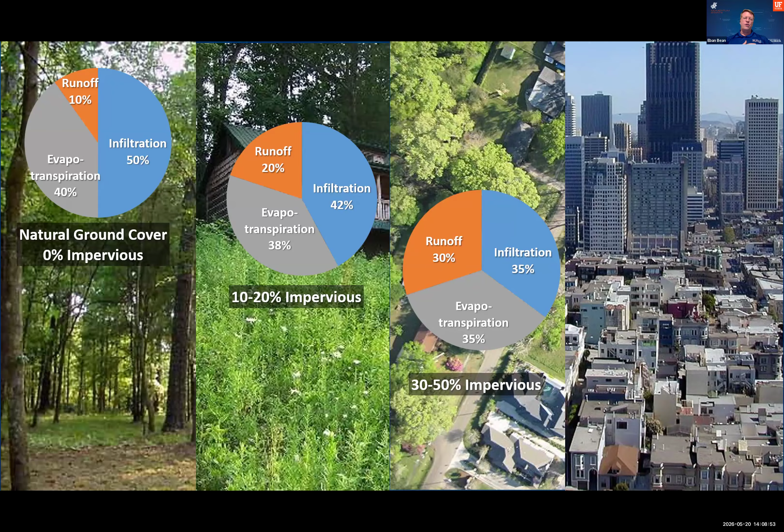And now when we look at your 30 to 50% impervious, think of your residential development, basically quarter-acre lots or smaller. Now we've got maybe 35% infiltration, 35% evapotranspiration, and we're up to about 30% runoff. And then in our ultra urbanized downtown urban centers, we've got only about 15% of that rainwater infiltrating through cracks and limited pervious area, 30% evapotranspiration - which is really most likely evaporation from puddles - and about 55% of that rainfall actually runs off.

Now, if we take the 30 to 50% imperviousness, the residential neighborhood, and compare that to natural ground cover - thinking 10% runoff to 30% runoff - that doesn't sound like much. There's only a difference of 20%, but it's actually 3 times as much rainfall being converted to runoff by changing the landscape that way.

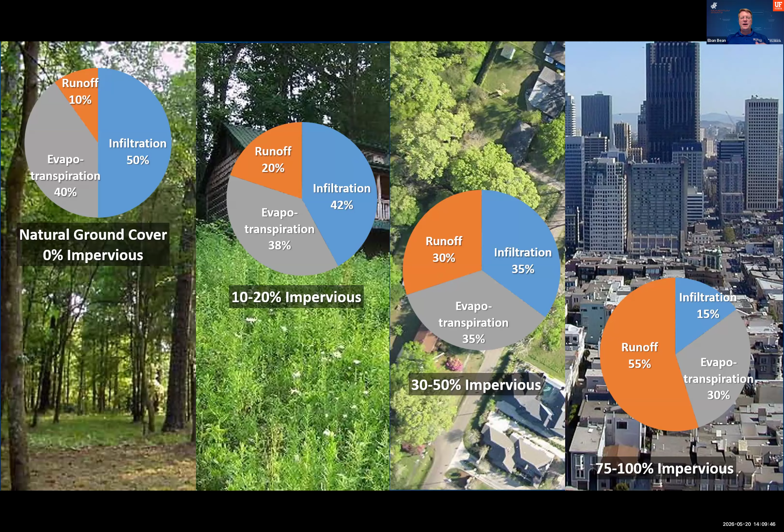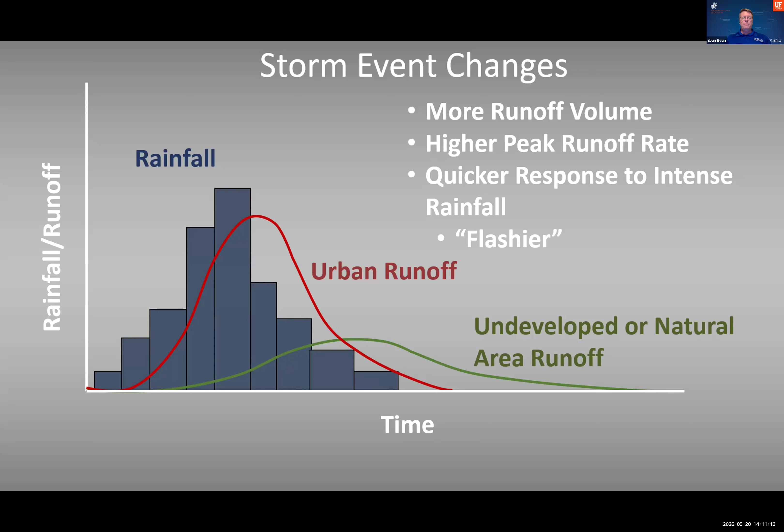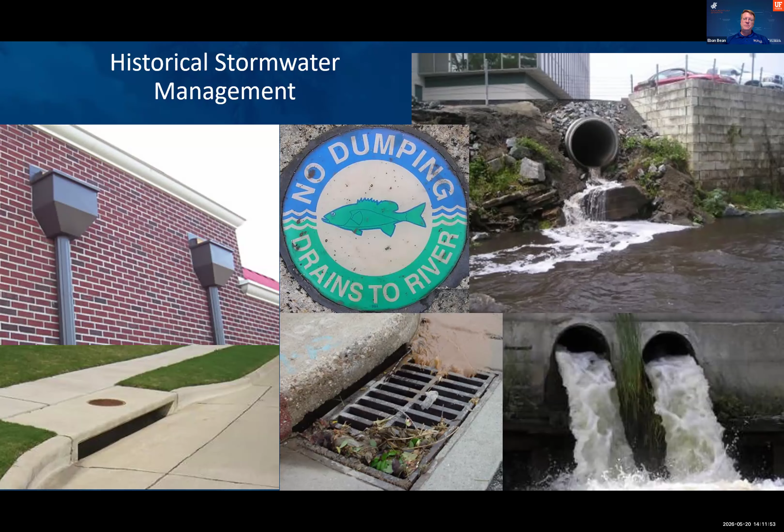Historically, our approach to stormwater management has been to get water off site as quickly as possible. If you look at older cities and downtown areas, you probably won't see many ponds or open spaces, just pipes directed to the nearest creek or waterway. We've gotten pretty efficient at this, with scuppers on buildings routing runoff directly to the street, stormwater inlets and grates, and stormwater pipes that discharge into the nearby waterway.

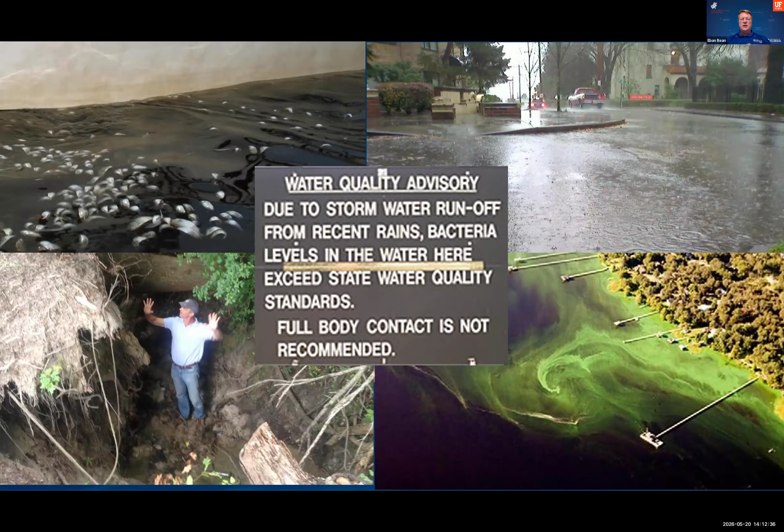But there are also water quality issues from stormwater runoff. We can have fish kills, erosion - this is a friend of mine who's about 6'4" standing in a channel that's about 20 feet deep by 6 feet wide - and excess flooding. So when we get water off site quickly, that might be good for you, but if all that water comes downstream, someone else gets flooded out. That's not a good situation. We can also have drivers for algal blooms.

When we think of stormwater runoff, it's not just the volume though - it's the chemicals that it washes off the urban landscape. A lot of urban landscapes can be sources for pollutants we're trying to manage or eliminate. Our roadways accumulate oils and chemicals from cars, sediments, and metals like brake dust. Parking lots collect sediments and organic debris.

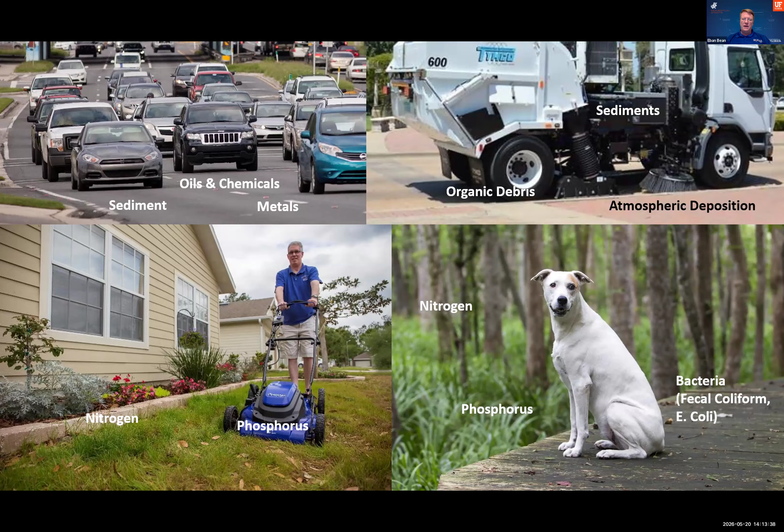There's atmospheric deposition of contaminants or nutrients that accumulate over time. Our lawns can contribute nitrogen and phosphorus, particularly if we're fertilizing inappropriately. And then our pets - this is not my pet, but essentially they are walking, barking point sources of nutrients and bacteria. If we don't pick up after them, that can enter the environment and wash off as well.

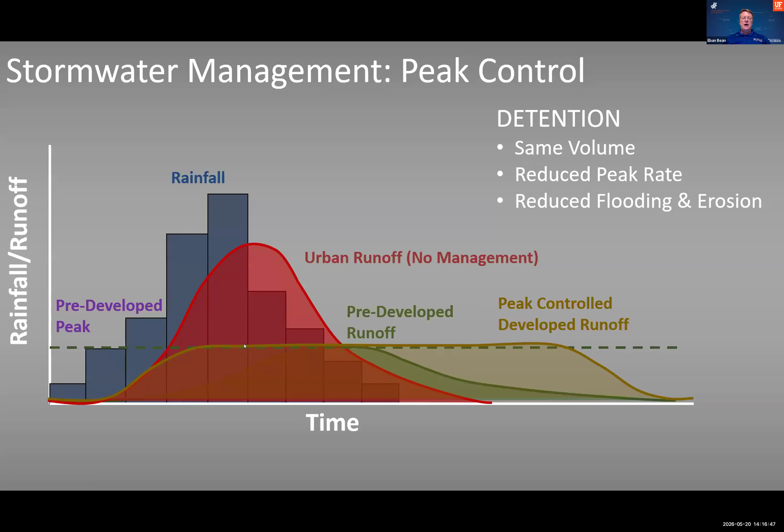With detention, the approach is to capture that additional runoff and slowly release it over time. If we look at our pre-developed runoff versus urban runoff without management, we see that increase. But if we identify the pre-developed peak as the allowable flow rate for stormwater to move through, we can capture that water and extend it out at a lower flow rate over time. This reduces flooding and erosion, reduces that peak rate, and reduces the risk of flooding downstream.

So when we look at the size of storms we're trying to manage for flooding and designing, we can't design for the 1,000-year storm event - those happen so infrequently and are so large that it's usually not feasible to design for those. What we're typically required to design for are storms within the duration of 24 to 72 hours.

Typically we're looking at storms somewhere between a 25-year and 100-year return period. With the return period, that doesn't mean that one storm of that size will occur within 25 years for a 25-year storm event. It actually means there's a 4% chance of that size storm occurring in any given year. Similarly, with the 100-year storm, it's a 1% chance of that happening every year. So that's how we can have 100-year events in multiple years that aren't separated by 100 years.

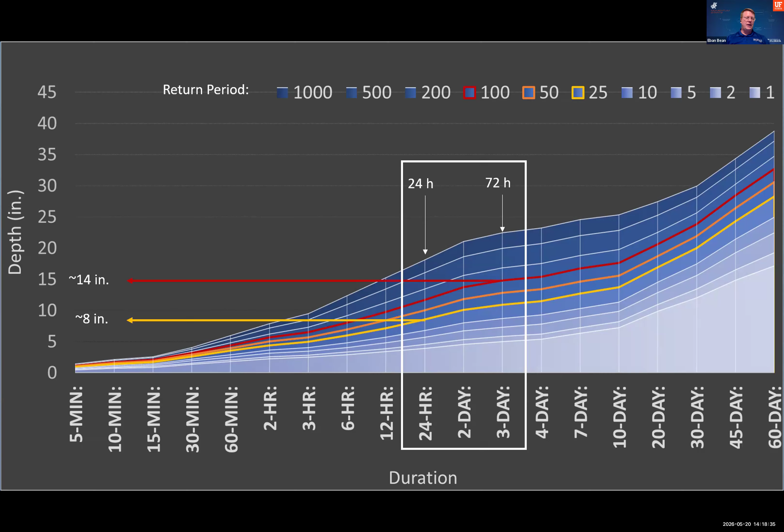If we look at the size of these storm events for the flooding we're considering, it's somewhere between 8 and 14 inches of rainfall as that design storm. So if we have a hurricane or large storm event that exceeds 15 or 20 inches in many parts of the state, that's going to have more water than our stormwater systems can manage, and it's going to overflow, causing extra flooding in our communities. So yeah, we're looking at that range, roughly 8 to 14 inches.

Stormwater ponds are one of the main ways we've implemented to manage flooding and peak runoff rates. Looking around Florida, we did this analysis a few years ago and found there are about 76,000 ponds statewide, which is probably a low estimate now given the amount of development and continued installation of stormwater ponds. There are so many that they take up more area than industrial land uses, which is pretty surprising. It's a prevalent part of the urban landscape.

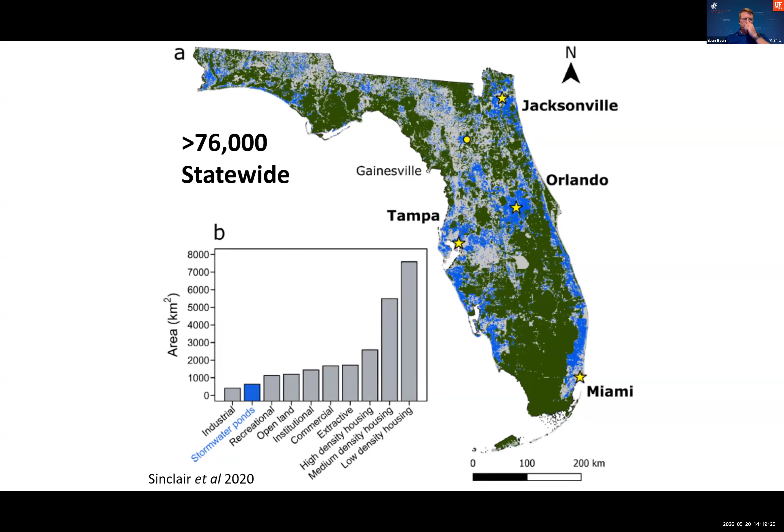The typical orientation we see in a lot of land development projects around Florida is an urban area — in this case, a residential neighborhood. We have rooftops that drain into the driveway, then flow into the street, which flows into a storm drain inlet and into a stormwater pipe collection system that goes into a stormwater pond serving that area of residential development.

This stormwater pond is designed to address several things. Number one is flood control — capturing that runoff volume and slowly releasing it, which also reduces the peak rate. We also get water quality benefits.

One thing unique about Florida compared to many other states is that elsewhere in the country, the pollutant of most concern is total suspended solids, or sediment in the water. Those areas often have very fine clay soil that makes water cloudy, and they also tend to have steep topography, much steeper than Florida's, which causes channel erosion — streams cut down and widen, moving a lot of sediment from the stream channel. That's not so much the case in Florida, except maybe in the Panhandle and the northwestern part of the state.

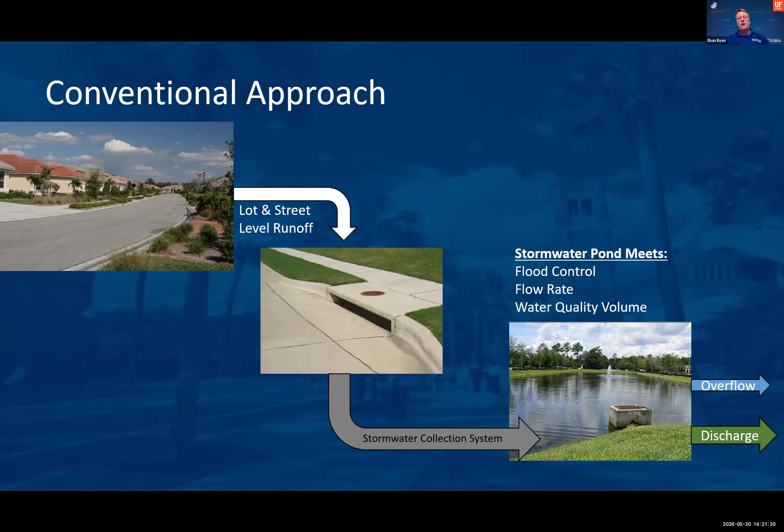Here, our biggest pollutants are actually nitrogen and phosphorus. Those are our main pollutants of concern, and that's what our stormwater pond treatment is intended to address.

While stormwater runoff is one of the main contributors to water quality impairment, agriculture also contributes, as do septic systems. So urban development isn't necessarily the biggest driver, but it's one of the top causes, which is why it's important to address. What we see is that stormwater runoff and water quality impairment tend to follow the urbanization of watersheds over time.

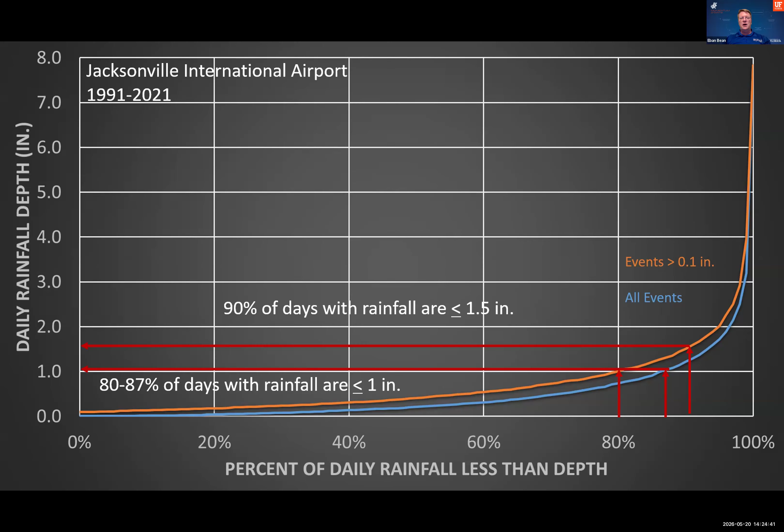So we're really looking at a very small amount of rainfall on a regular basis contributing a lot of our nutrients to stormwater.

So next, I want to get into the nuts and bolts of stormwater systems and talk about some of the different components so that when you're in your communities, you can identify and see the different elements of a stormwater system and better understand what's happening there. So we're going to break it down a few ways.

The watershed is the land that's developed, and that's where essentially runoff is generated, right? So then the water comes off of that landscape, and then it's collected into inlets.

That's where basically water is directed into pipes or channels to convey it to another location, and that's where it's usually routed to a stormwater best management practice.

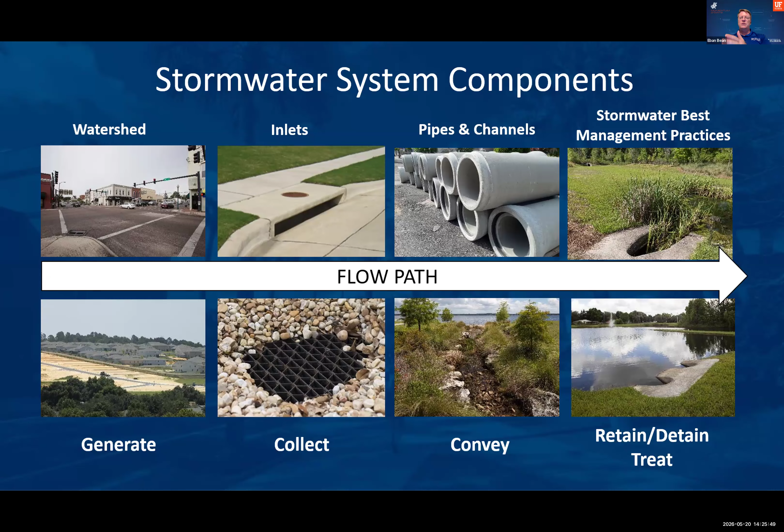In Florida, many times this is going to be a stormwater pond of some type, and we'll talk about what those are and how they function in a minute. But essentially, we have the flow path: we have rainfall in the watershed, that runoff goes into the inlets through pipes and channels and into our stormwater BMP.

So thinking first about watershed components, within our urban area we have the impervious areas on the left, which are our rooftops, our concrete, and our asphalt. These are the surfaces that essentially prevent water from infiltrating into the ground.

And so that water, instead of infiltrating, has to go somewhere—that's our runoff. On the right, we have our pervious areas. These might be forests or landscape beds or even lawns.

And these are the areas that can infiltrate rainfall, that can infiltrate runoff, and provide a function to us in that capacity.

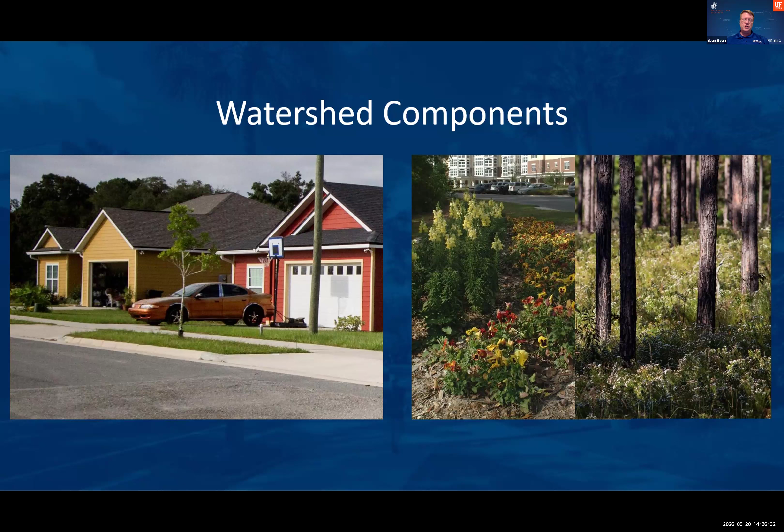Within the urban landscape, you'll often see this structure right along the sides of roads. You might have heard the term curb and gutter. I used to think that was just the name of it, just one word, curb and gutter.

But it's actually two distinct parts of the structure that's right along the roadway, usually right up against a pervious area. Essentially, you have the curb, which is the vertical part, and the gutter is the bottom part.

Now, you're probably familiar with gutters along the side or rim of your house, and that's sort of the intent here—that is the place that routes and funnels water, right?

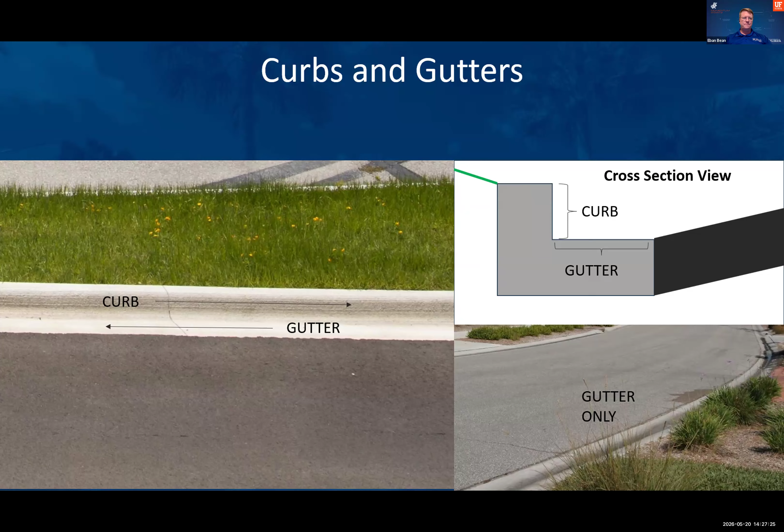And roads, you'll find, are typically going to be crowned, so they're highest in the middle, so that water drains away from the center and gets conveyed to the curb and gutters. You can kind of see this on many of our roadways.

So looking down a street, these are both on the campus of University of Florida. And essentially, when we have a rain event, that runoff flows to the edges so that the drive paths don't pond water—we don't have to drive through pools.

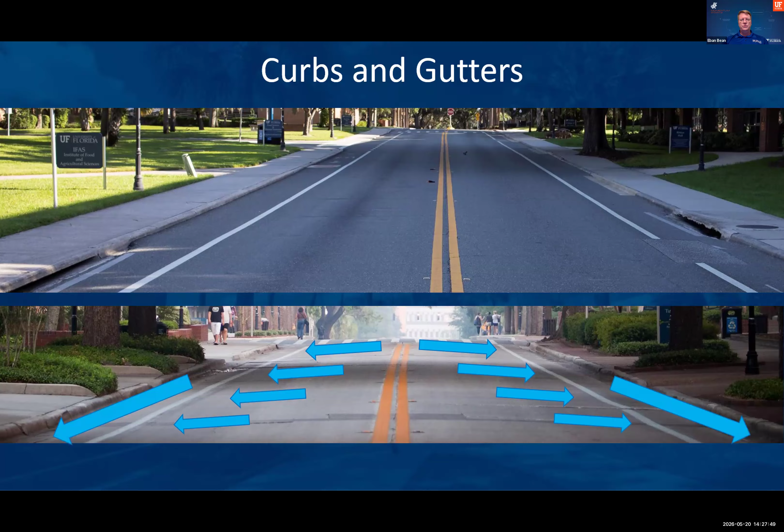We don't have hydroplaning. And then it collects along that curb and flows down the gutter into the storm drains. You can see an example here where the water is flowing down a street, down the gutter, and then flowing into an inlet.

Now, looking at the inlets, these are essentially the openings into the stormwater collection conveyance system.

Now there are several different types of inlets. This is essentially where water transitions from the landscape into a structure intended to move it to a certain location. The surface of the landscape will typically grade or slope to these inlet points, usually either a curb cut into a superficial inlet or structure.

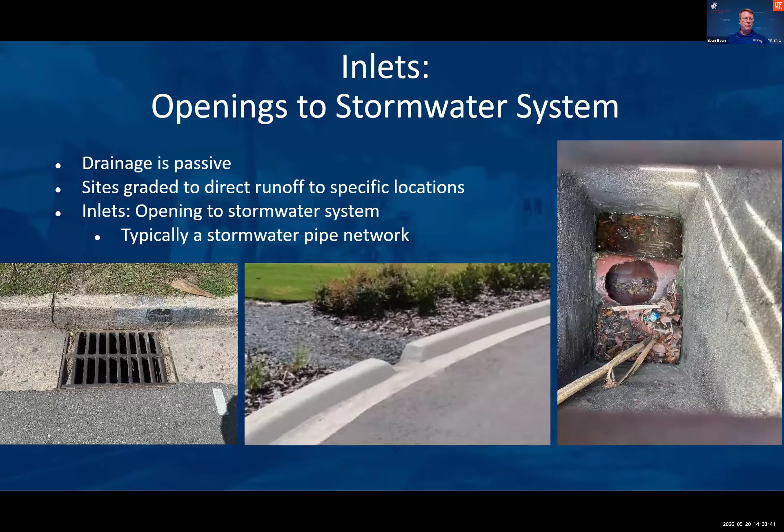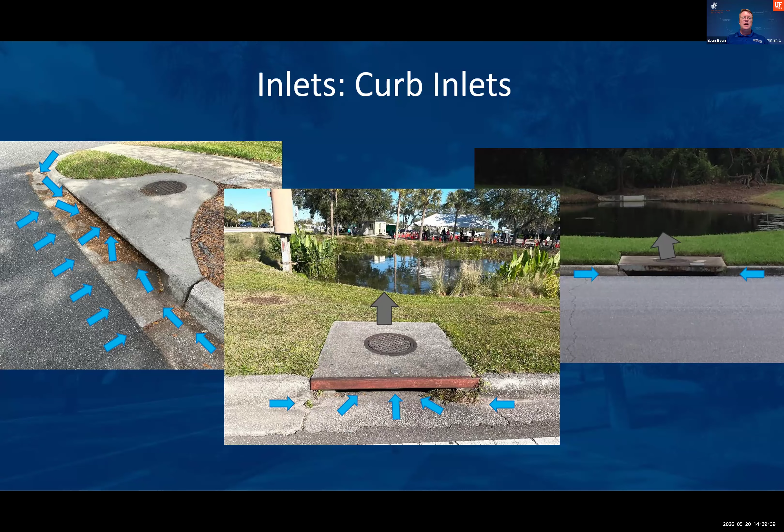These inlets come in different flavors. These are examples of curb inlets where the curb has a break in it, and water flows down into a storm pipe. In the left example, notice the debris that's collected there, which can eventually cause problems if it builds up and blocks water flow. It's good to avoid putting leaves or grass clippings down into them, since grass clippings carry a lot of nutrients. In each scenario, water is directed to the inlet and into a stormwater pipe that goes, in these two cases, into a stormwater pond immediately adjacent to it.

Inlets and grates are another common feature, usually seen adjacent to roadways or in parking lots. These are in low spots where stormwater runoff can drop vertically into a pond or pipe and drain. Part of the function of a storm grate is to create a smaller opening than a curb opening so that larger debris doesn't make its way into the storm drain system.

You do see a combination on the left of a curb inlet and a stormwater grate — that's also a configuration we see. But oftentimes these grates stand on their own, level with a low spot in a road or parking lot, and you can see where the flow lines go at this site. Again on the left, with that yellow curb, note the debris accumulation. If that continues to build up, it can cause issues with the stormwater system by not allowing water to flow through as quickly as it's supposed to.

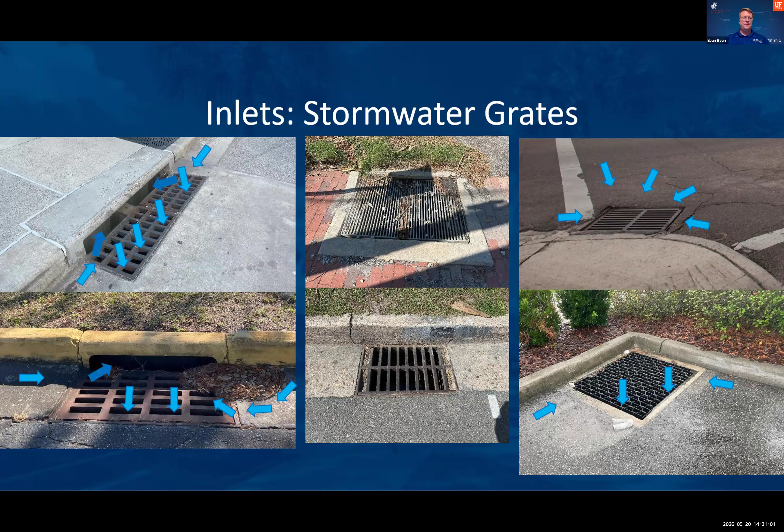Curb cuts are openings in the curb that try to connect impervious areas with pervious areas. These are also areas where debris can accumulate and cause backup, reducing function. But this is a really efficient way to make adjacent pervious and landscape areas more functional, so runoff can flow onto the landscape and infiltrate into the ground rather than going into a stormwater pipe network or pond.

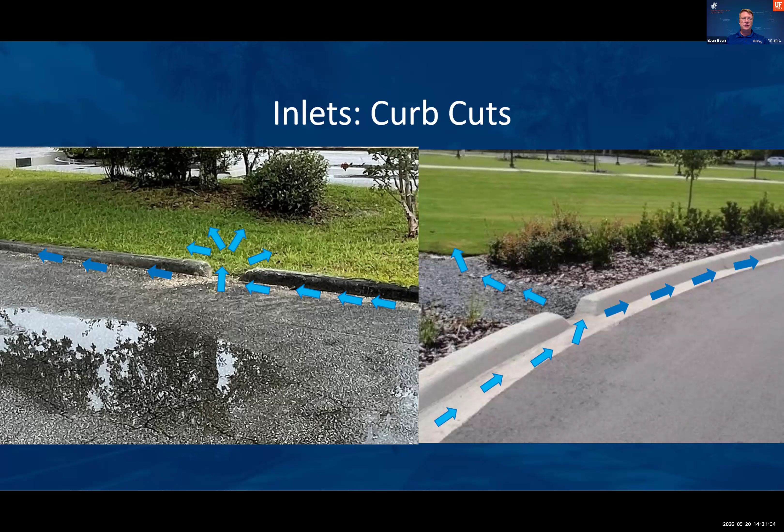Pavement drains are found in the middle of a roadway or drive path. Essentially they are a drop inlet into a stormwater pipe network, usually at the low spot, and most often within a parking lot, since the sides are graded to the stormwater inlet, allowing water to flow into a pipe network that flows downstream. You see this more in parking lots than roadways, because with roadways we're crowning the road to sheet water away rather than collecting it in the center.

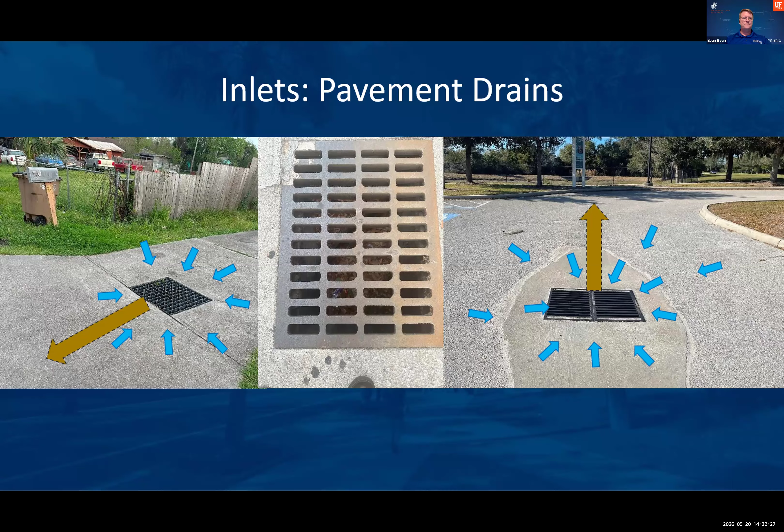Another similar configuration to those parking lot drains is field or surface drains. These are basically in the middle of landscaped areas or at the ground surface, allowing runoff to flow into them. You can see the screening function happening, particularly in that upper center one. If debris is allowed to build up, that can again cause issues with water not flowing through as quickly as designed. Here water collects at the surface and is then taken away by a pipe underneath.

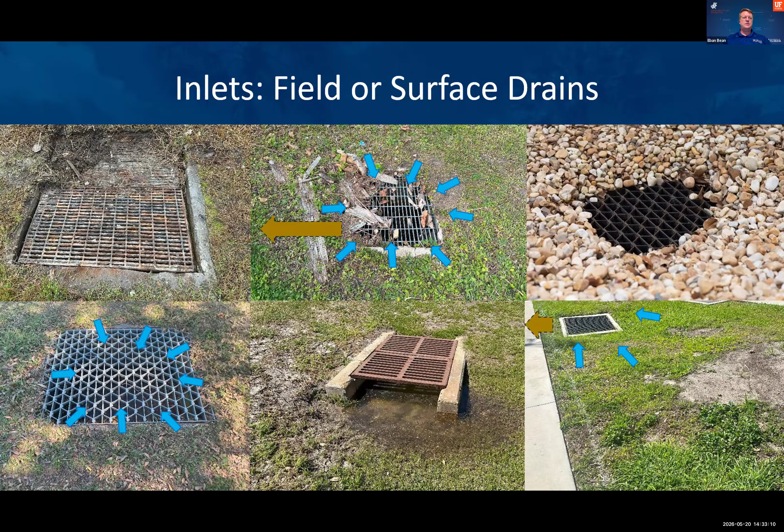Now let's take a look at the stormwater conveyance elements: stormwater pipes. These are oftentimes out of sight, out of mind, so you most likely haven't seen these much, but there are some pretty common materials.

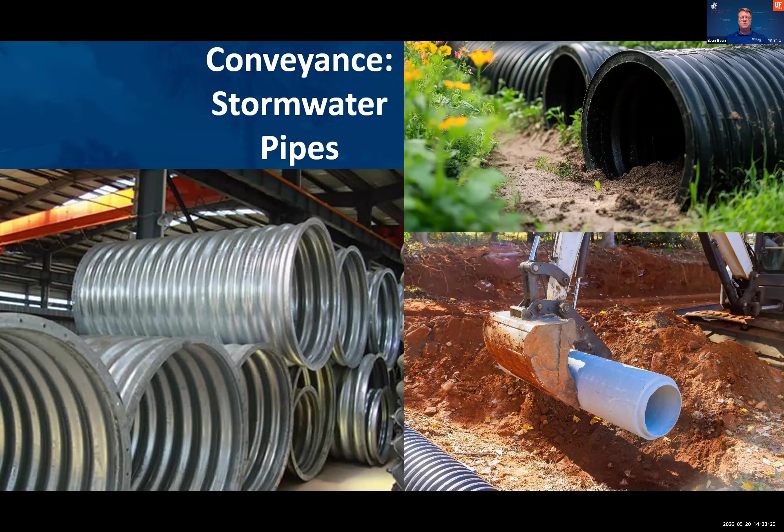A lot of times we'll see corrugated plastic pipes, corrugated metal pipes, and concrete pipes. Those are the three most common types of material in stormwater drainage. Ideally, we'd like smooth wall pipes rather than ridges or corrugation, since this helps water move completely through and not get trapped behind those ridges.

When we see manholes, these are the pipes for our storm inlet or stormwater system, not the sewer system. If you're curious which system a manhole is for, usually on the top it'll say sewer or storm. You can take a look at storm if you want, but I would not recommend opening a sewer.

Culverts are pipes, usually short sections, intended to move water from one location to another underneath a roadway or crossing. That's essentially all a culvert is. These can oftentimes fall into disrepair if they're not maintained, and can have accumulation of sediment downstream or upstream and get clogged.

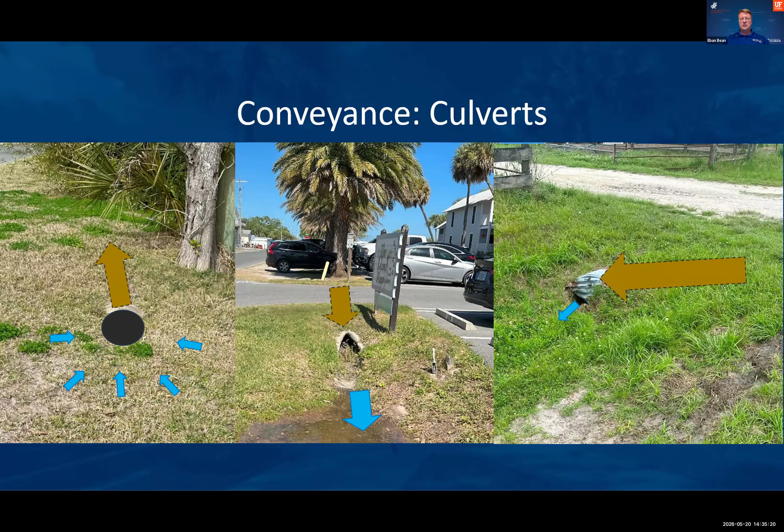Maintaining them is important to having water flow through. These can also be the inlet to a stormwater system. In this middle picture, water is coming from the background to the foreground, and here on the right, water is moving across. That blue arrow is small because this corrugated pipe has likely been driven over and crimped, so the opening is now smaller and can restrict the flow. Maintaining and making sure pipes are large enough is important.

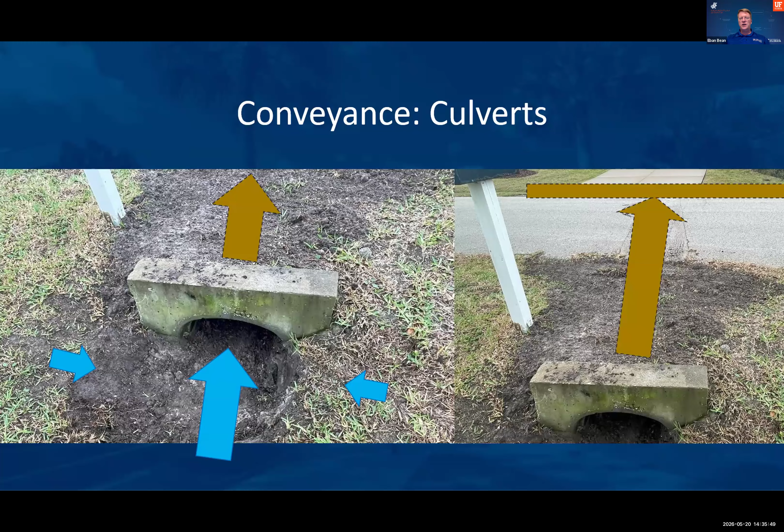Sediment is also a big concern. It can accumulate in culverts and clog them up, so it's really important to keep that clear. Usually you'll have a swale leading into a culvert - water drains from the landscape on either side, accumulates, and flows through under the pipe into another cross pipe or other place downstream.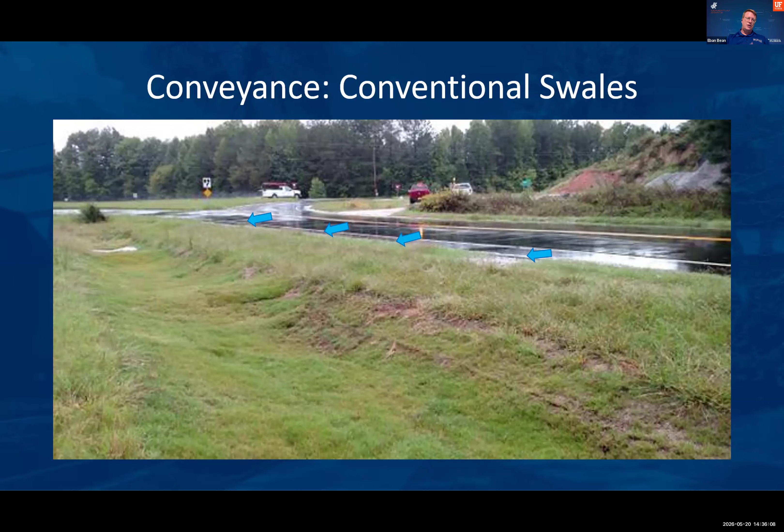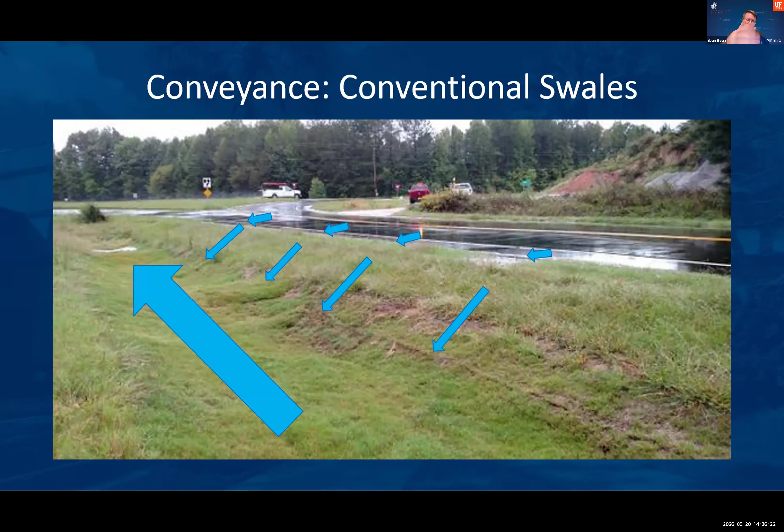A lot of times you can see swales along roadways - you may call these ditches from other places, I did growing up. But swales provide multiple functions. They not only convey and move water, with the roadway sheeting water down the slope into the swale and downstream, but as water moves downstream it's also allowed to infiltrate into the subsurface and get filtered, providing some water quality benefits as well.

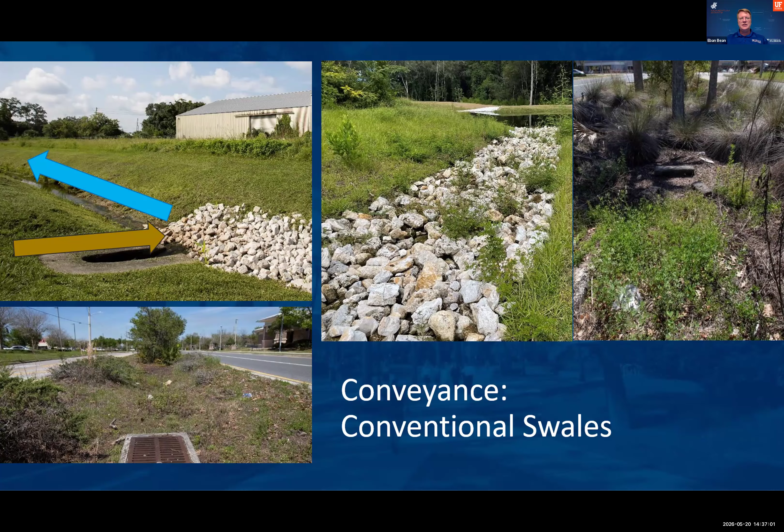Other ways you might see swales - if there's an erosion issue, a lot of times you'll see larger stone or rock in the channel to make the channel more stable so it's not washing out or eroding that sediment. In this figure in the upper left corner, water comes in this pipe from the left and has to make a 90-degree turn, which is essentially what's causing some erosion here. You can see they've tried to stabilize that with rock in this middle picture as well.

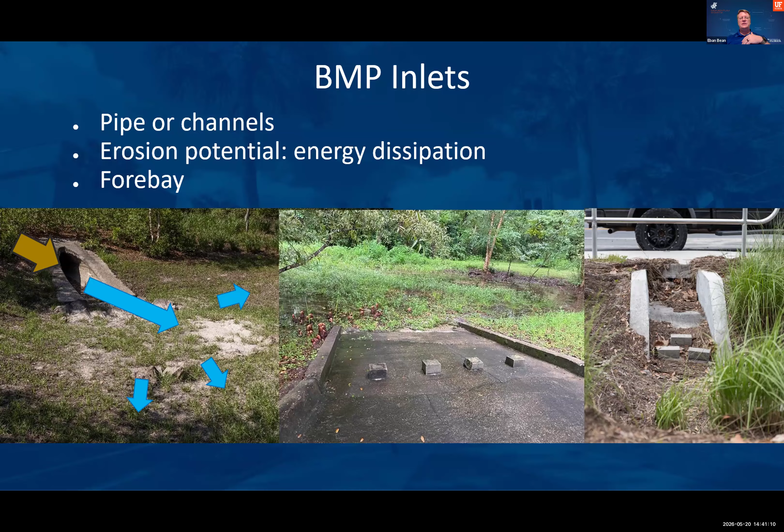With the one on the left, we have that water coming in. It can kind of erode out this area, and then water basically spreads out and dissipates that energy. If we need to reduce that energy more, other ways that we can control or dissipate some of that energy are through these blocks in these channels as water comes in. That can help to dissipate it. There's also a structure known as a forebay that will essentially create a pool at the inlet, and that can help to dissipate the energy as water comes directly into that BMP.

There's two different ways that BMPs can be configured with a stormwater pipe system. There's always a capacity limit to a stormwater BMP, whether it's a pond or a tank or whatever. There's a maximum volume, and once that's reached, that excess water needs to continue to be routed somewhere else. So we can either have the BMP be online or offline. I want to illustrate what the difference is here.

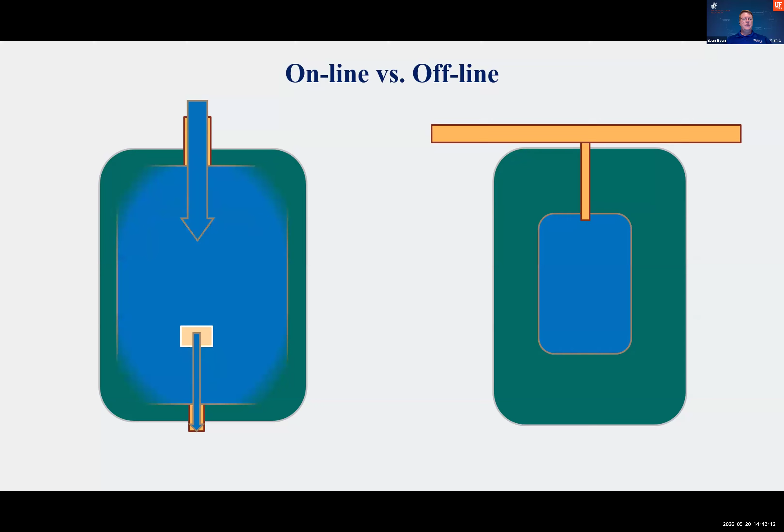With online, we have water come in for small storms. Water comes in and then bleeds down fairly quickly, and we don't see a whole lot of change in the water volume of the pond in this case. For larger storms, though, that water comes in, fills up the pond, and then it overflows or bypasses that outlet structure. So essentially, all of the water that comes off of the landscape and into the stormwater conveyance system moves into and out of that pond.

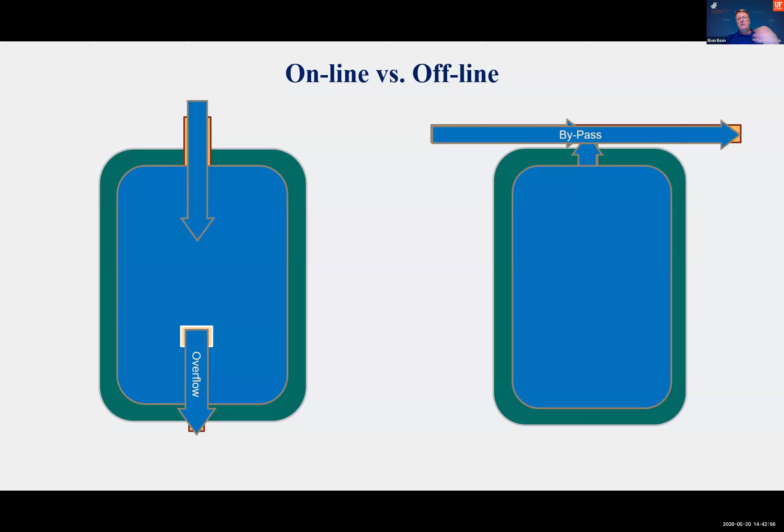If it's offline, for small storm events, we basically have just direct flow directly in, and we don't really see much difference in the operation. But when we have a large event, we'll have a high flow come in, fill up that pond, but then instead of overflowing downstream, we actually back up the water level, and then we have bypass where the extra stormwater bypasses that inlet and continues to flow downstream. So now not all of the runoff flows through that BMP - it's really just that first volume of storage that fills up the pond, and then the excess goes back down beyond it.

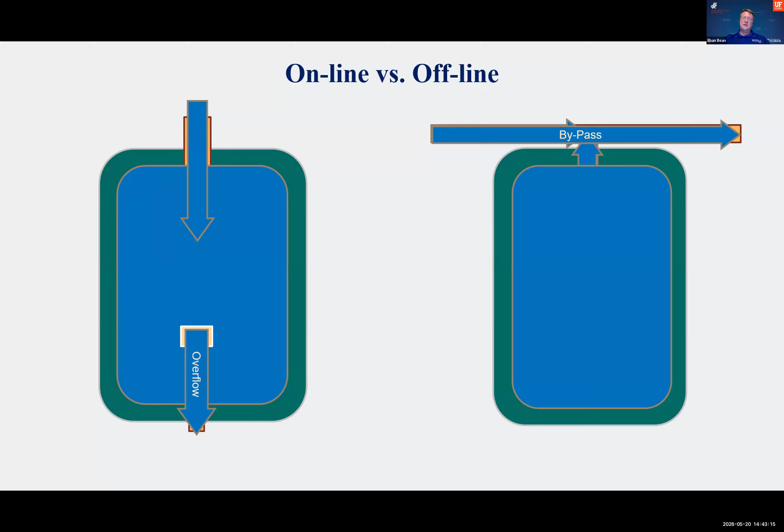So when you're looking for BMP outlets, outlets are only going to be for BMPs that are online, because with an offline system, it's going to back up through the inlet. There's no need for an outlet.

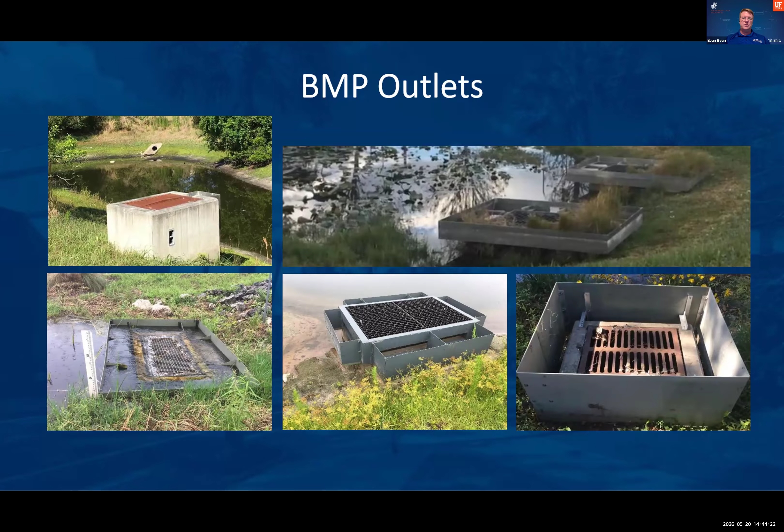So when we talk about different types of ponds or different types of BMPs, I want to go over the main ones real quick. The first one is what we call dry retention. This is something you would be able to see in areas that have very sandy soils, and maybe even in the springs areas, but you've got very well drained soils where water can infiltrate into the ground very quickly.

Essentially, the main way this functions is that water comes into the basin, fills up, and then overflows out through the overflow structure if it fills the basin, and that would discharge. But essentially that water would soak into the ground. For the most part you'd lose a little bit to evaporation, but it recovers its volume by infiltrating into the ground, and that also retains those pollutants.

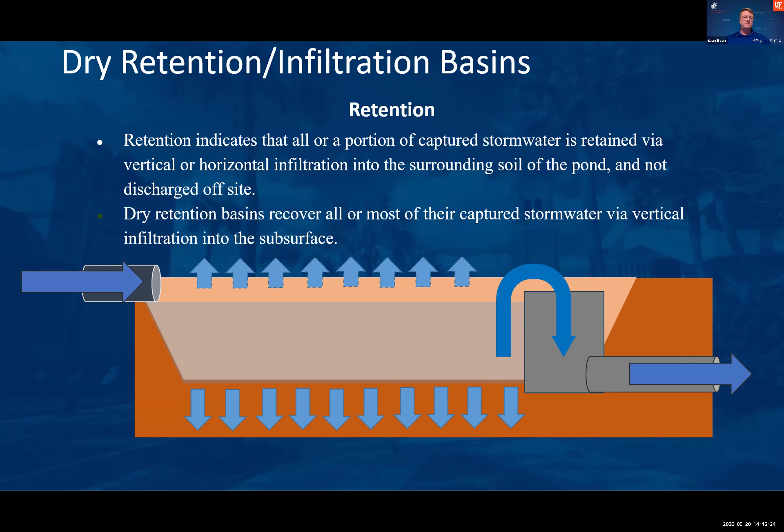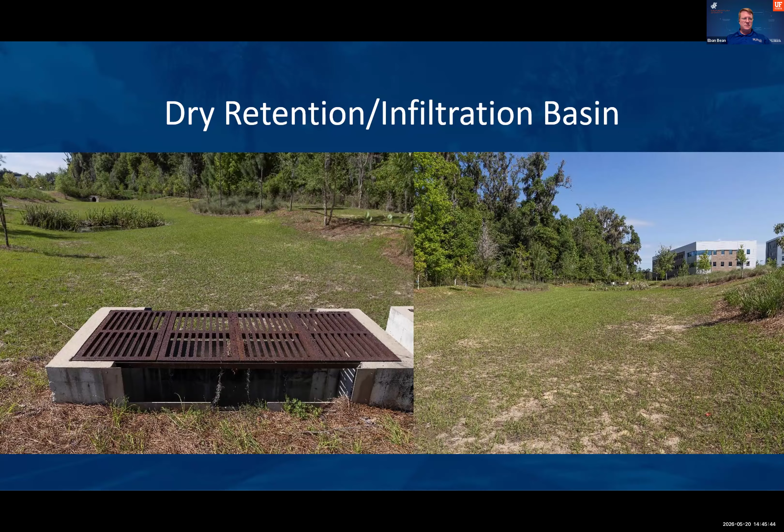You'll often see these look like a grassed area that is depressed, a low lying sunken area. You'll see these in a lot of areas where we have sandy soils, well drained soils. You're not going to usually see wetlands nearby, so keep that in mind.

Underground exfiltration is another way we can take stormwater from the surface and infiltrate it below. These are typically configured offline, and essentially stormwater comes off of a parking lot that overlies the structure, goes into a stormwater inlet, and then underneath that parking lot it will flow into these half pipes, these structures here. There's a lot of volume, a lot of space there.

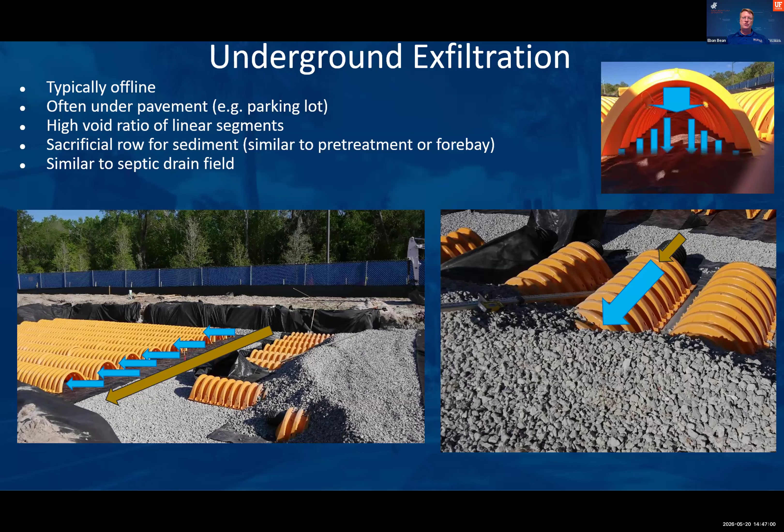Groundwater mounding is something I want to touch on briefly, because it can explain why, for example, a dry retention or any other infiltrating practice may sometimes, for certain storms, recover completely very quickly, but for other storms it may stay ponded for a long period of time.

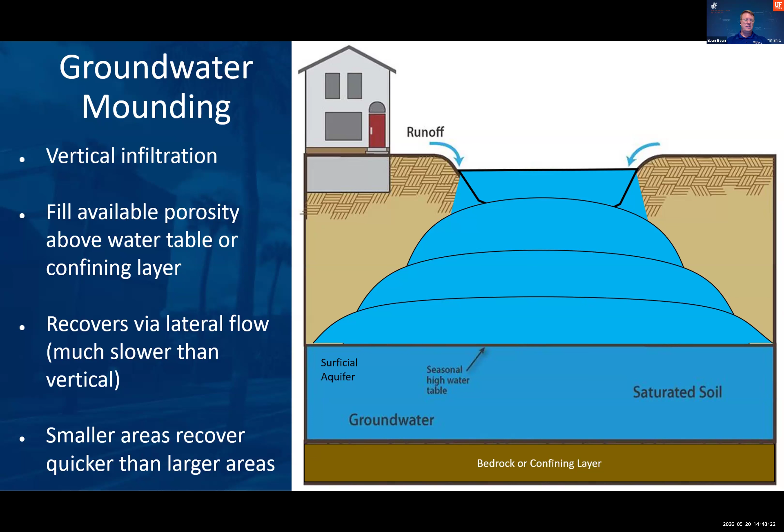And so if you have another storm event soon after one of these events, then that groundwater essentially mounds up underneath this infiltrating practice, and so it can interfere with its ability to recover the storage over time.

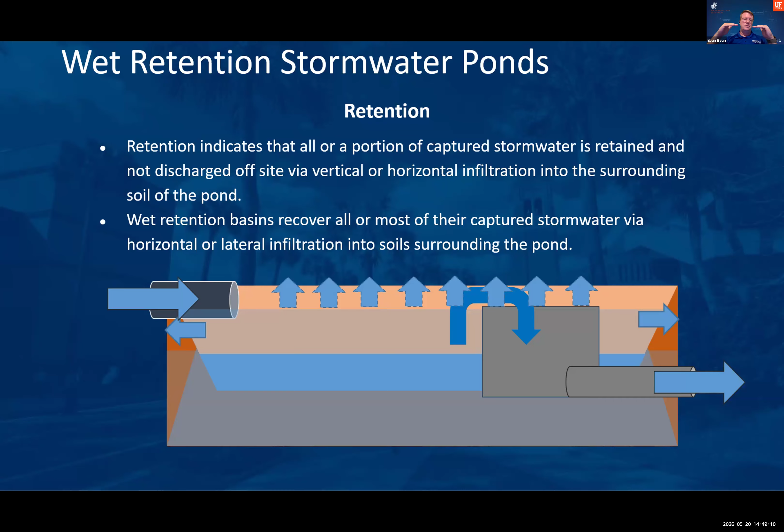Wet stormwater ponds, or wet retention ponds, are one of our most common types of stormwater BMP. Similar to dry retention, they basically retain a certain volume. Runoff comes in and fills up the pond from the normal water level up to a design level. If we have excess water, that will overflow through the outlet structure and downstream. But over time, it will essentially infiltrate laterally, and we will have evapotranspiration, because oftentimes what's happening here is that we are intersecting the groundwater, the water table that is perching that water to maintain water in these ponds permanently.

Detention ponds are actually not intended to remove volume. They are essentially just for controlling the flow rate and really for flood control, basically reducing that peak runoff rate. The way these work, whether it's dry detention or wet detention, is kind of similar. You have water come in to the pond, it fills up, it overflows, and then basically all of that water bleeds back down, and you have the same amount of water that leaves the pond as came into it.

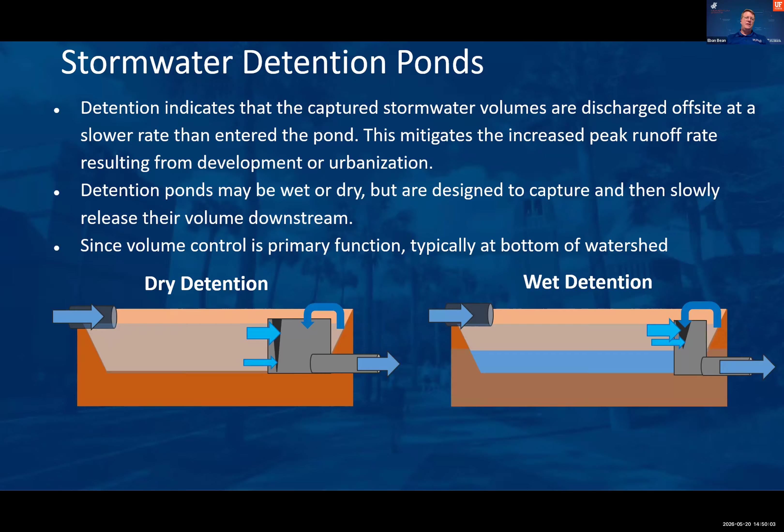With wet detention, water comes in, it fills up above the permanent pool, and then that water will overflow, and it will slowly bleed down afterwards and discharge downstream. One of the main things is that we don't have very much benefit from water quality with detention ponds, because none of that water, or that volume of water, is meant to stay.

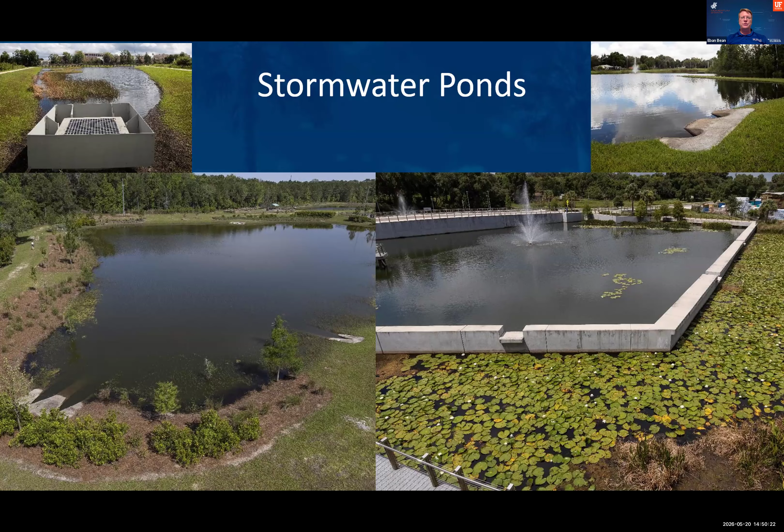But you'll see different configurations of stormwater ponds around Florida. You can see different inlets and outlet structures. They make up quite a bit of our landscape.

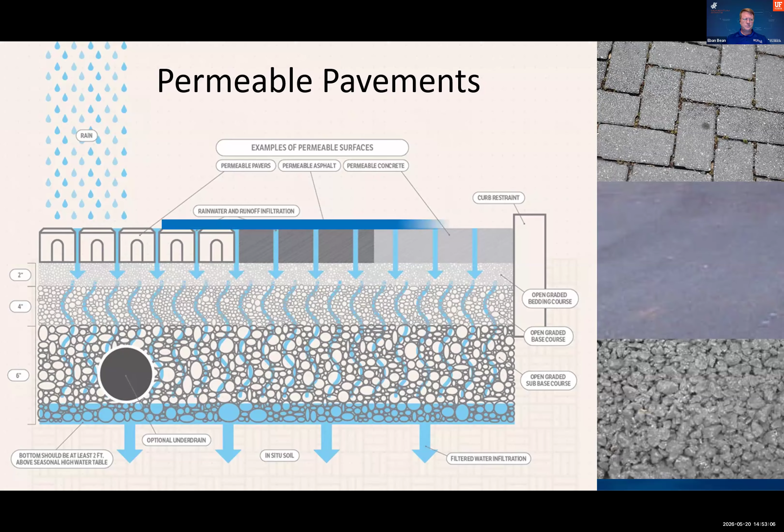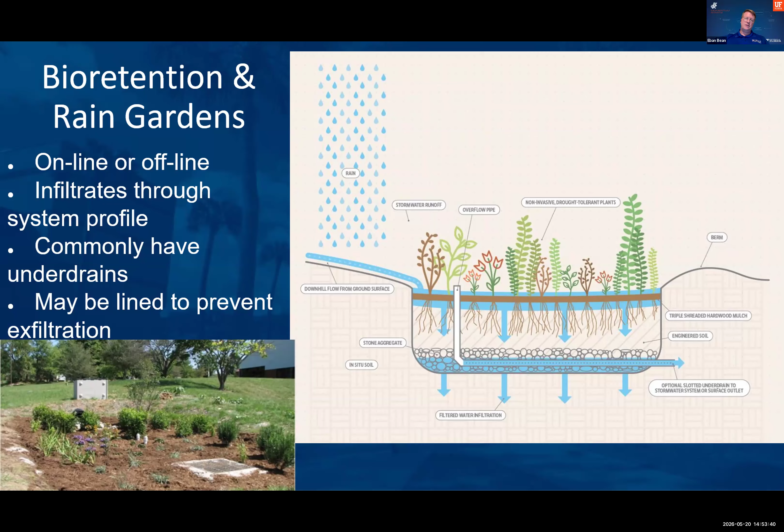With bioretention, these can be online or offline, and these are oftentimes smaller scale dry retention, but they usually have vegetation planted in them to provide an aesthetic. They commonly have underdrains to make sure they recover the volume within the practice before the next storm event. This allows water that drains through the surface into a stone layer below, and that slotted pipe will basically take that water downstream. Usually within about 24 hours, it can be recovered.

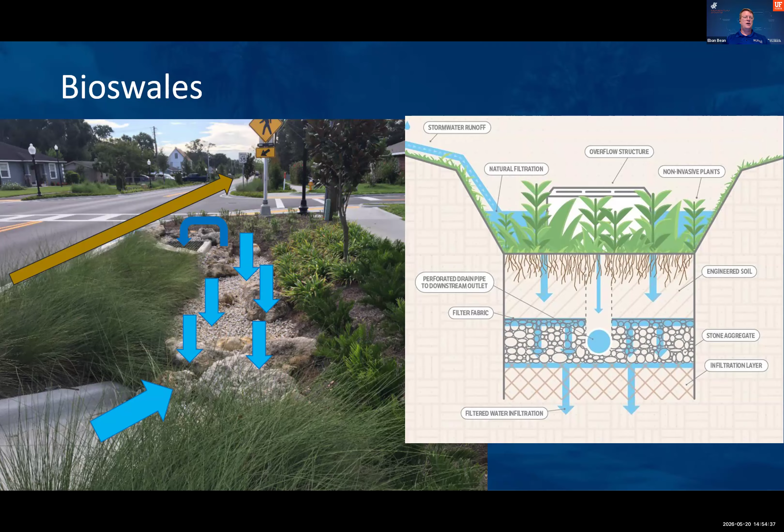Bioswales are kind of a twist on bioretention. Swales are meant to convey water, and this is intended to do the same. You're usually taking it from one place to another, but it forces a certain flow rate of water down through the engineered soil and into the stone layer, where there's an underdrain pipe that routes it into the stormwater network and takes it downstream. If there's excess flow rate, it can overtop the overflow structure and cause water to overflow downstream directly without being filtered. If the flow rate exceeds the storage of the bioswale, it can bypass.

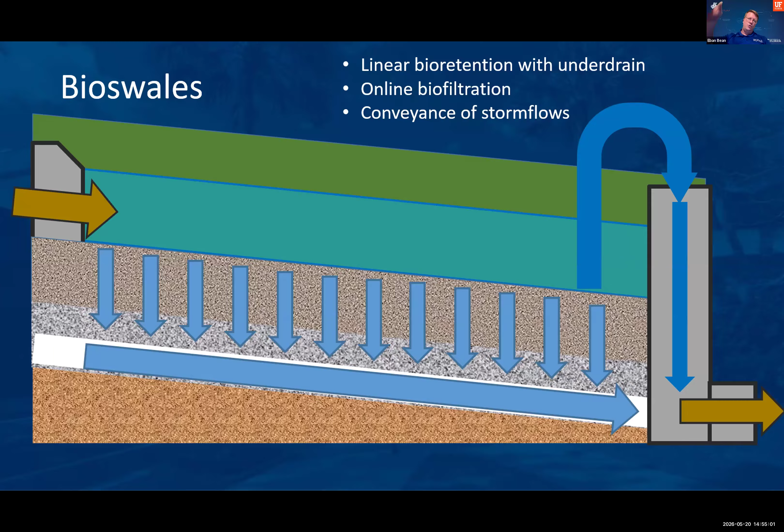Just another look at bioswales, a cross section. Usually you have water coming in, which builds up and is then forced to go down through different layers of soil or media to improve the water quality. The underdrain collects that water and sends it into the drain downstream. If the water level gets too high, it will overflow into that overflow structure.

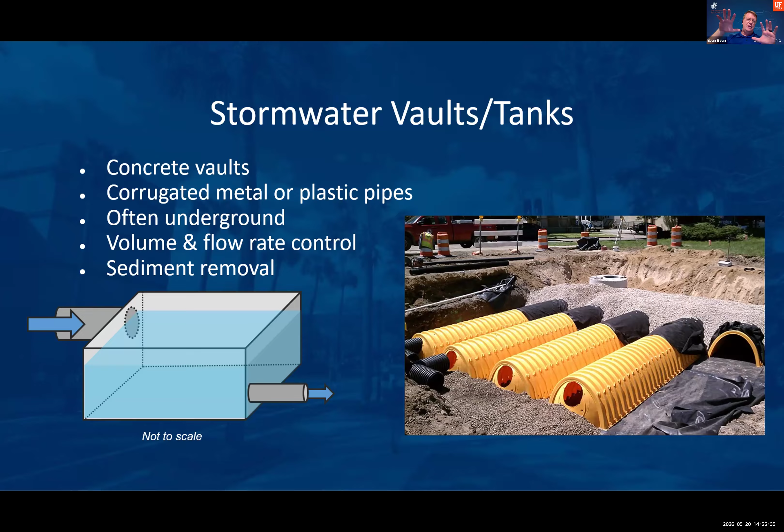Stormwater vaults are another practice, not necessarily green infrastructure, but very common. This is essentially a detention structure meant for volume and flow rate control. They do have some sediment removal, but essentially it's like a big tank that's underground. It looks a lot like subsurface exfiltration, but this system does not exfiltrate or allow water to drain. Water fills up, comes in very quickly, and then slowly bleeds down out downstream, preventing flooding from occurring.